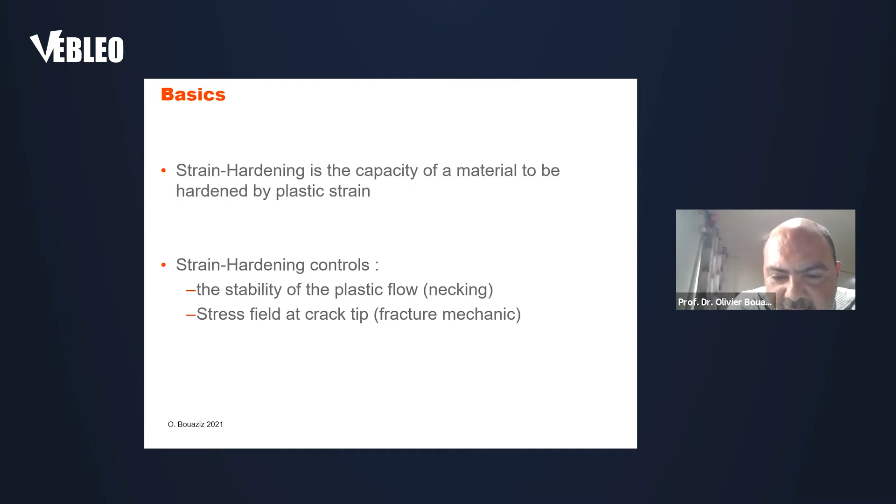So why is strain hardening relevant? Strain hardening is the capacity of a material to be hardened by plastic strain. It controls the stability of plastic flow, in other words necking, so it's important for forming operations, and it also controls the stress field at the crack tip in fracture mechanics.

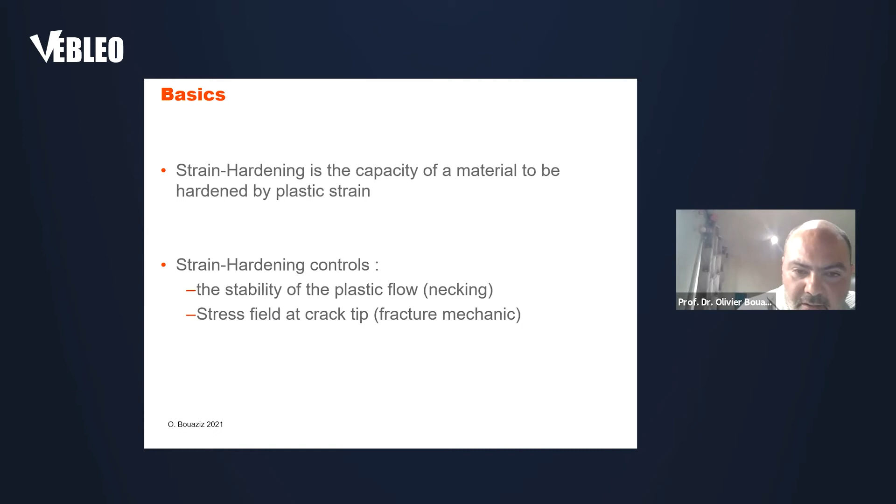So we want an ideal material exhibiting a high yield strength, but sustaining strain hardening.

Unfortunately, currently in the literature, you can see the effect of grain size refinement on the yield strength, as shown on this graph. The refinement of grain size in metal is a very efficient metallurgical solution to achieve ultra-high strength materials, especially with iron. The main benefit could be interesting for combining strength with other in-use properties such as weldability, recyclability, or coatability due to the low alloy metallurgy.

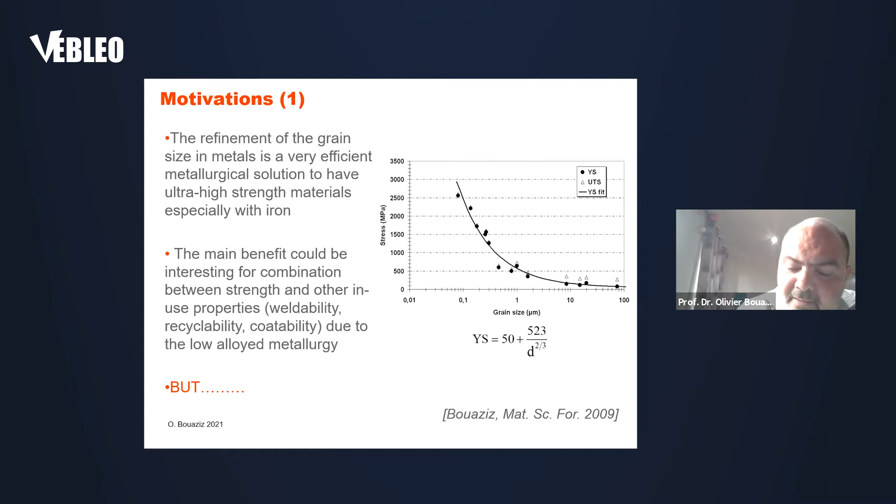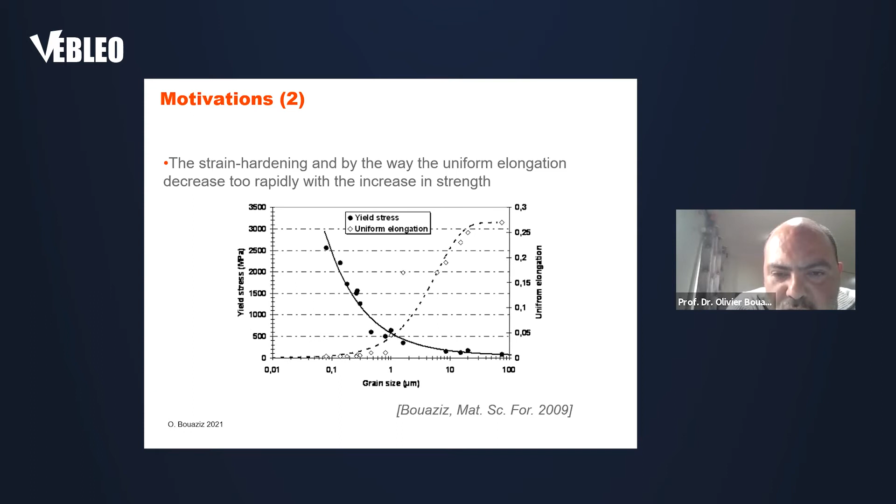But there is a problem: as the yield strength increases a lot, the uniform elongation, and thus the strain hardening, drops dramatically to a low level. This is a strong limitation for the use of this kind of material. So the problem is we have to find ways to overcome the detrimental effect of microstructural refinement in single-phase alloys, especially for yield strength higher than 1 GPa.

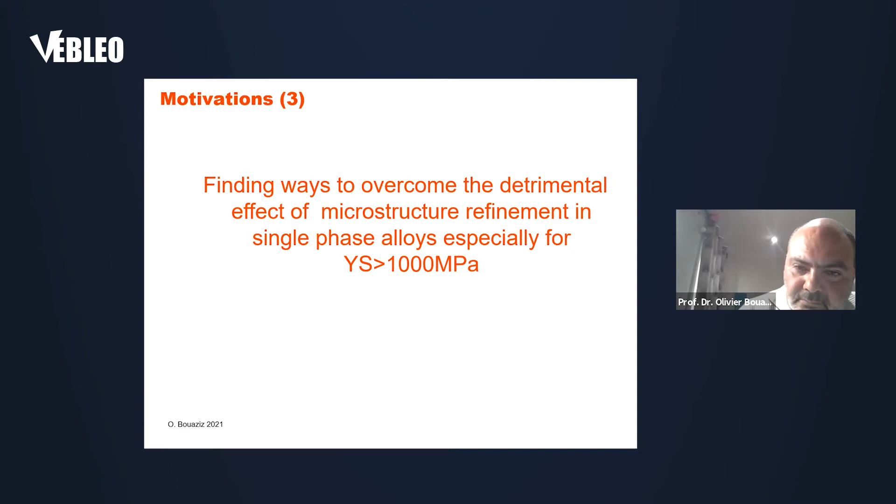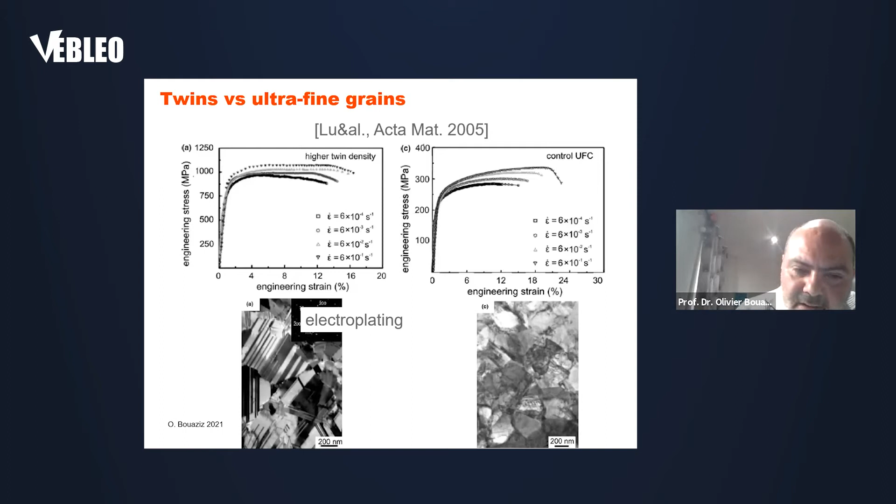So in 2005, Lu et al. showed something interesting. By electroplating copper, they obtained copper with a high density of twins, and the mechanical properties are strongly improved. It seems that the behavior of nanostructured metallic alloys with a high density of twins is very promising, but the use of an electrodeposition process is not consistent with production of massive bulk materials for structural applications.

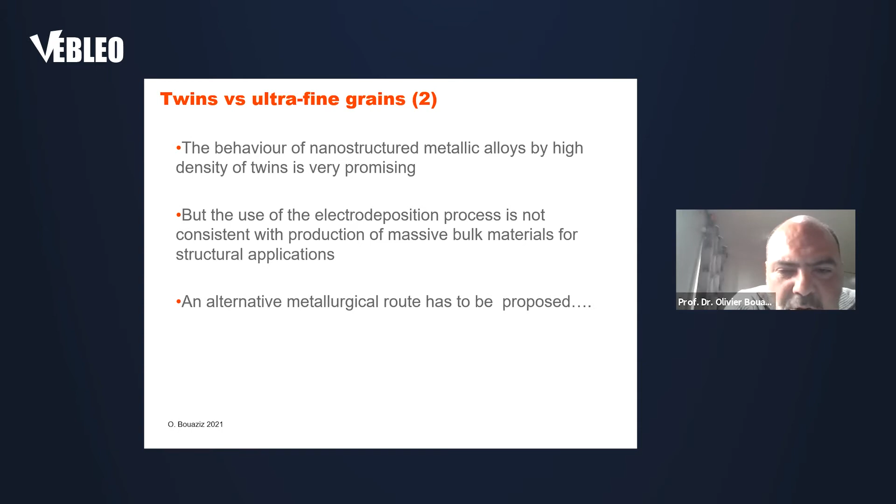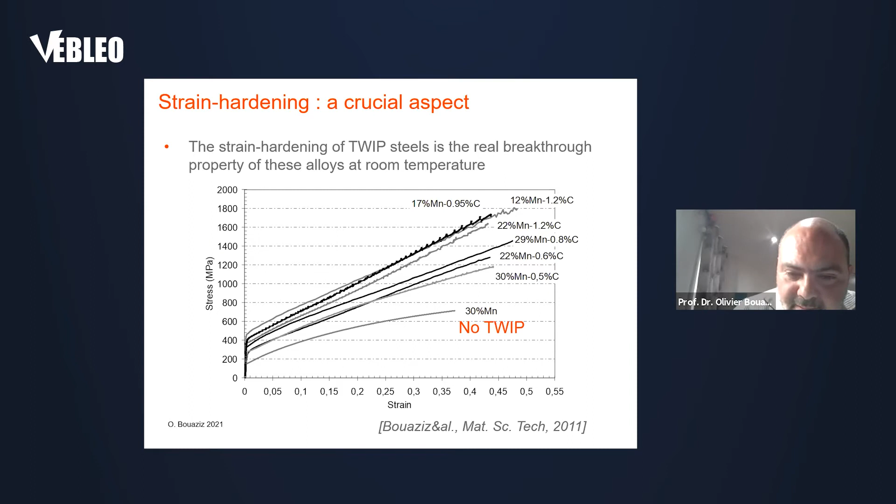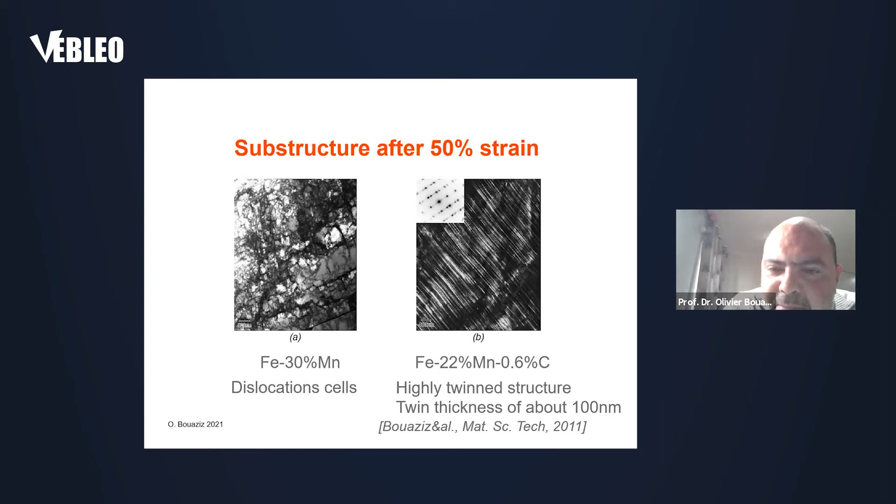So why is the strain hardening so high? It's because by deformation, the alloy twins. As you can see here, when there is no twin, you have cell formation, as usually observed. But in the case of twinning at room temperature, you have nanostructuration of the material by a lot of twinning. And what we have shown in different papers is that the properties are controlled by the interspacing between twins.

So the problem with TWIP steel is that despite the high strain hardening, the yield strength is too low for anti-intrusion applications, for instance.

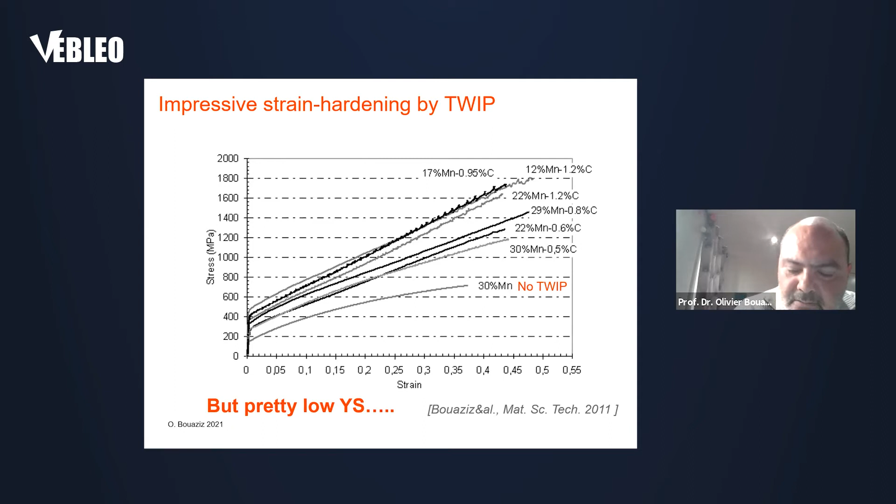This picture is a key picture of my talk. It is a TEM micrograph during the recrystallization of TWIP steel. What is interesting to see is that you have a volume fraction of recrystallized material, but in the non-recrystallized material, you see twins mechanically induced at room temperature, persisting at high temperature.

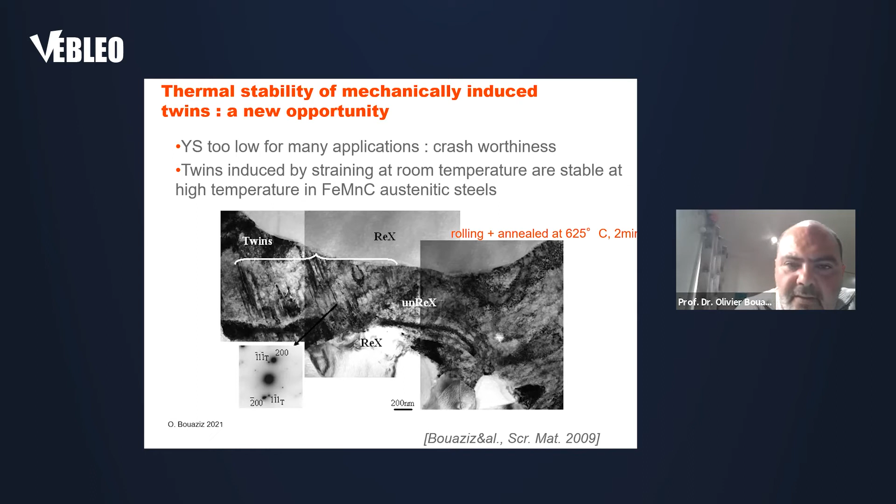So it seems that twins are stable when you increase the temperature. The idea is the following: we know that yield strength is controlled by the twin spacing. So it has been proposed to induce a high density of twins by rolling at room temperature and to recover the dislocations by thermal treatment at a temperature lower than the twin stability, thereby keeping the twins.

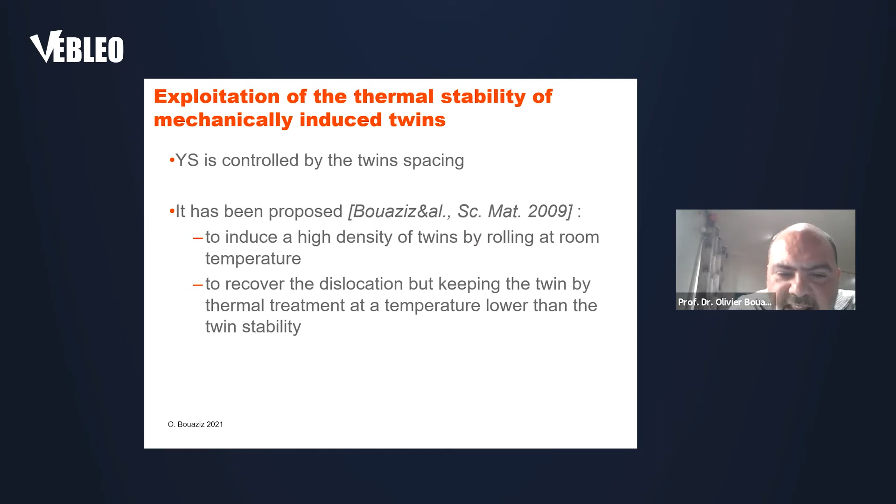The first results I can show you are from deformation by rolling. You can see an example of the microstructure obtained after 30% pre-strain and recovery treatment. You see that all the twins are kept in the structure despite the thermal treatment.

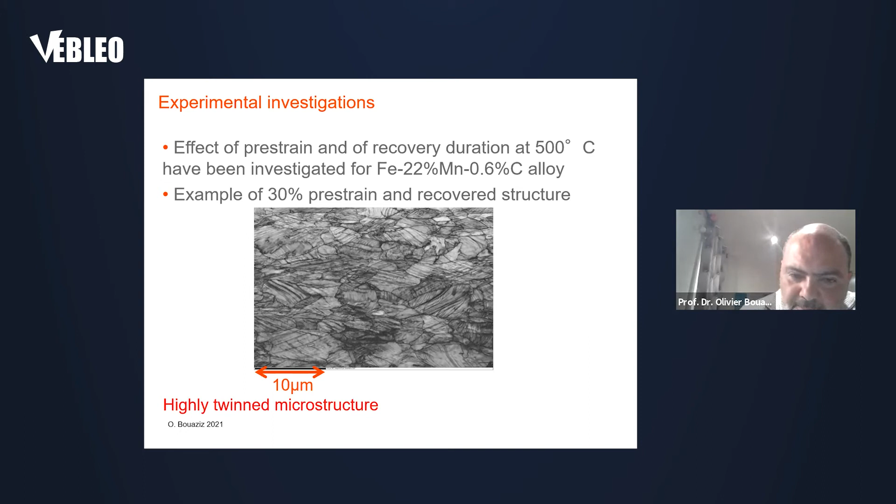So here are the results for 50% cold reduction. In the as-received condition, it's a low yield strength material with high strain hardening. But if you deform the material at room temperature by 50% cold reduction, you obtain a curve with no uniform elongation. However, by thermal treatment, you recover the strain hardening more and more as a function of the cold reduction, so you can have a material with yield strength higher than 1 GPa and uniform elongation of 15%.

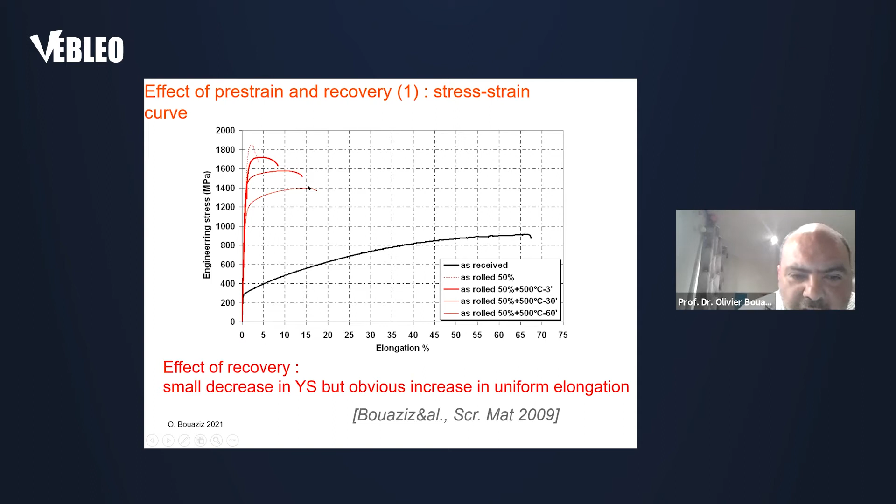So it is a strong improvement. We show here the results with different cold reductions, and you see especially that 30% is very interesting because you obtain a yield strength higher than 1200 MPa and uniform elongation of about 20%.

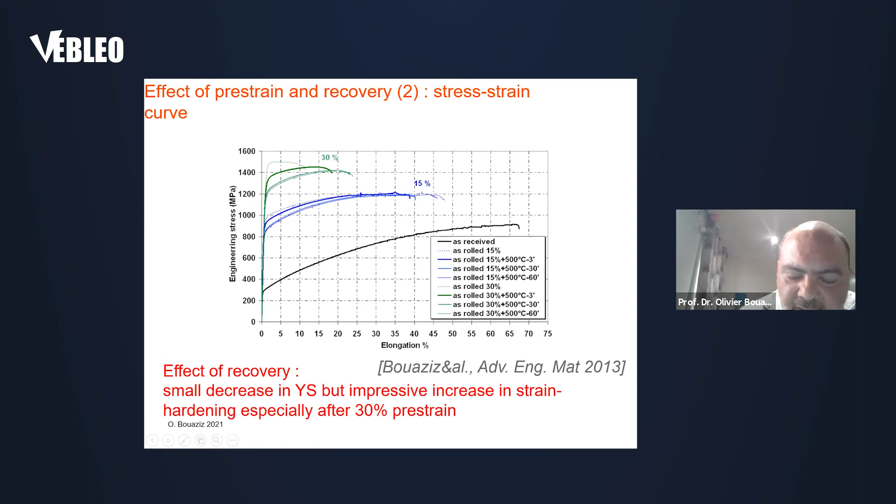This graph shows that the YS decreases just a little bit, but you recover the strain hardening after the recovery treatment.

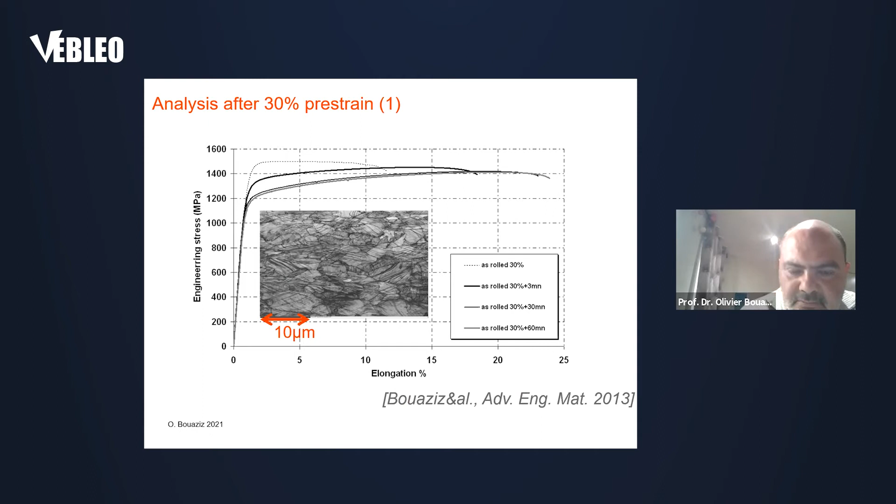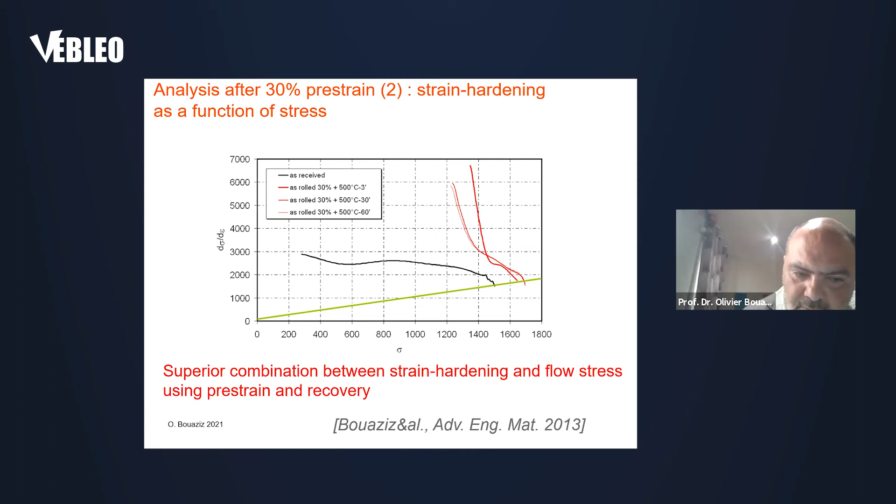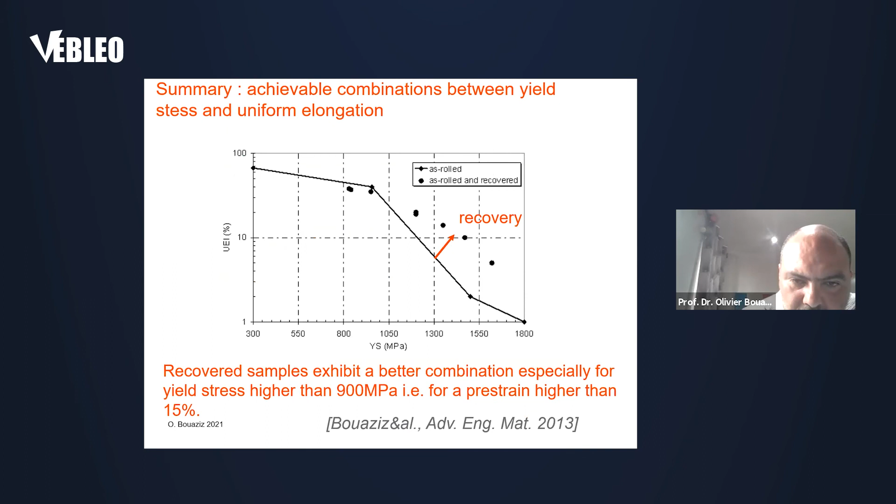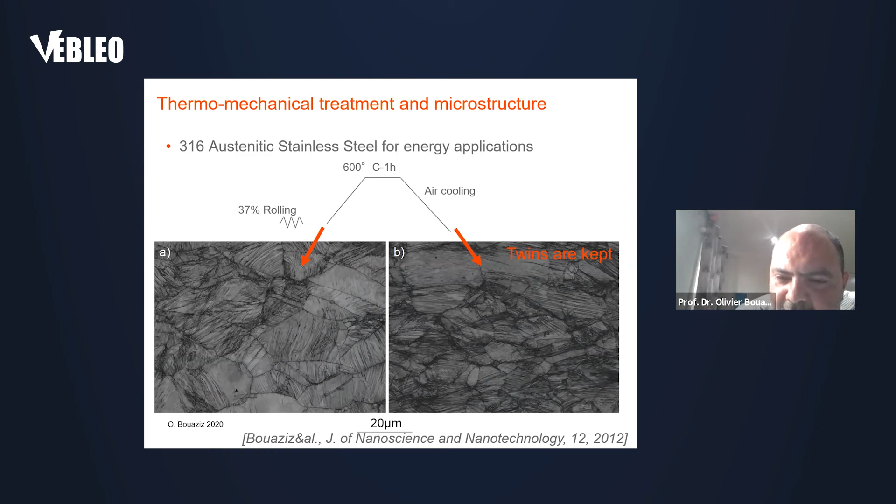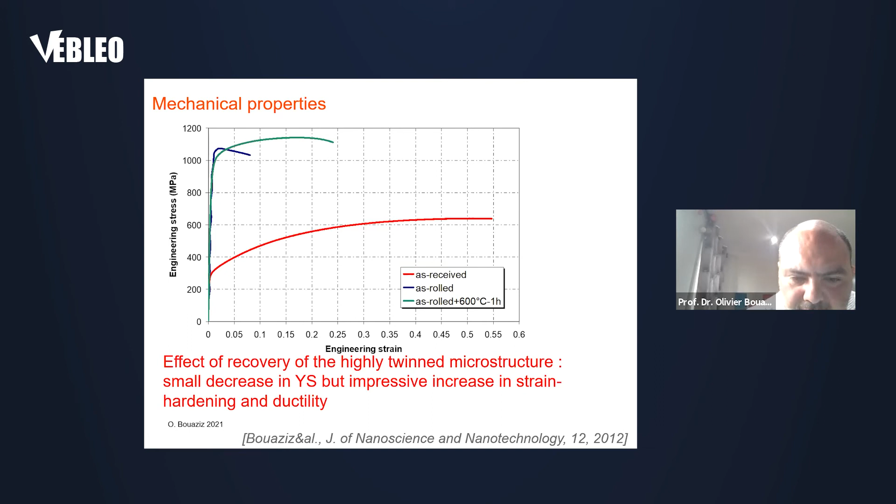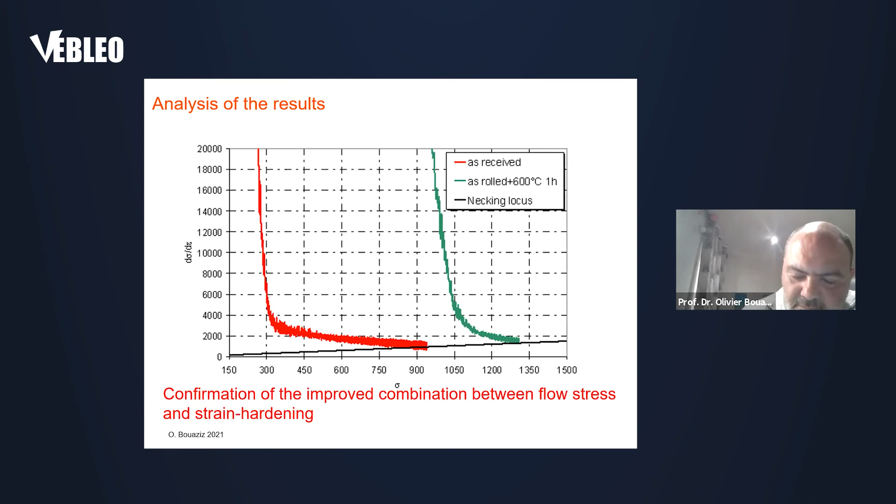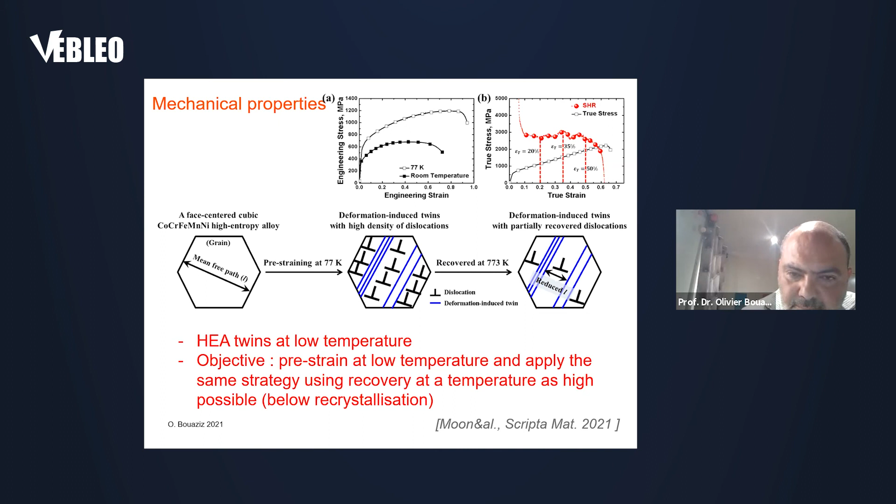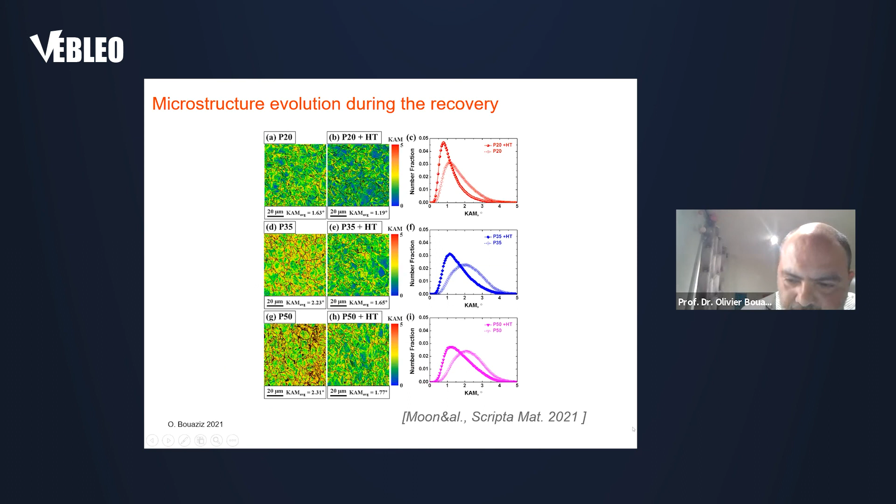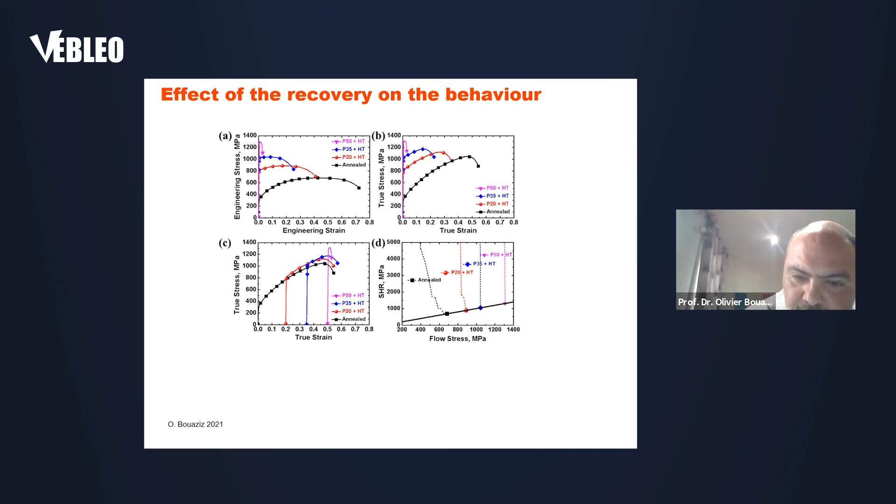So in conclusion, the balance between strain hardening and strength in nanostructured material is a key challenge for the future of this field. The advantages and limitations of grain size refinement have been highlighted. A promising metallurgical route exploiting the thermal stability of mechanically induced twins in austenitic steel and in high entropy alloys has been proposed and applied, and the result confirms the opportunity to get nanostructured alloy exhibiting high YS with a high strain hardening, using a realistic metallurgical route by twinning engineering.